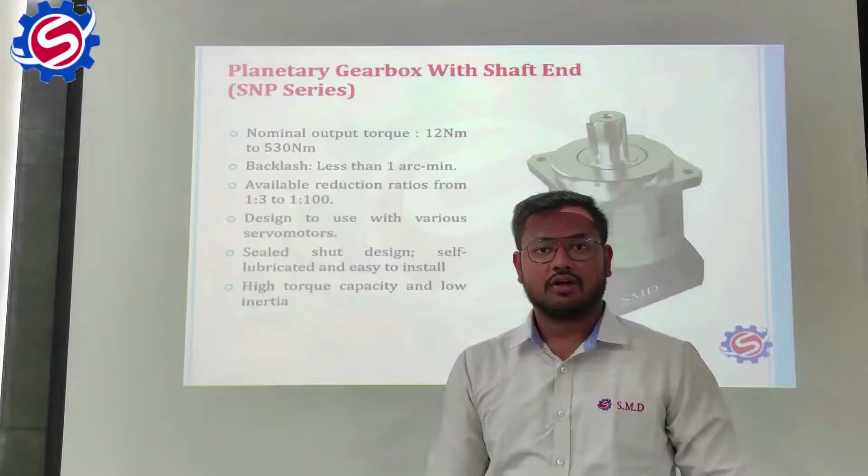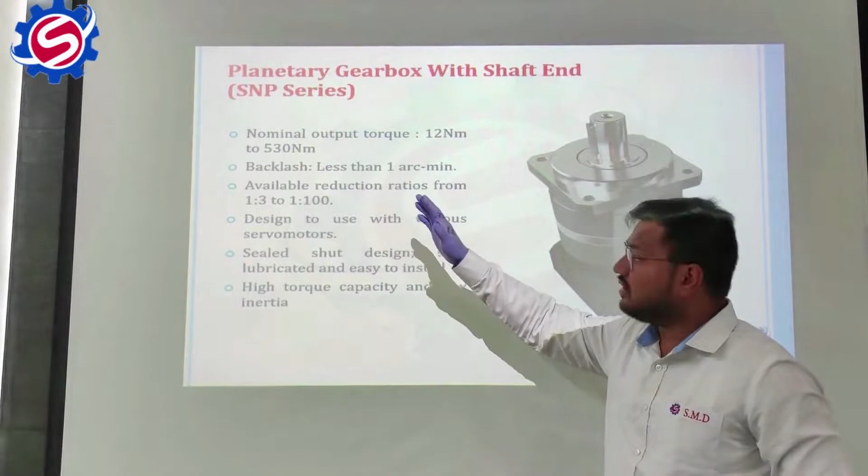Gearbox with shaft end, which is also known as SNP series. Our planetary gearbox nominal output torque range starts from 12 Newton meter to 530 Newton meter, which has backlash less than 1 arc minute. Available reduction ratio from 1:3 to 1:100.

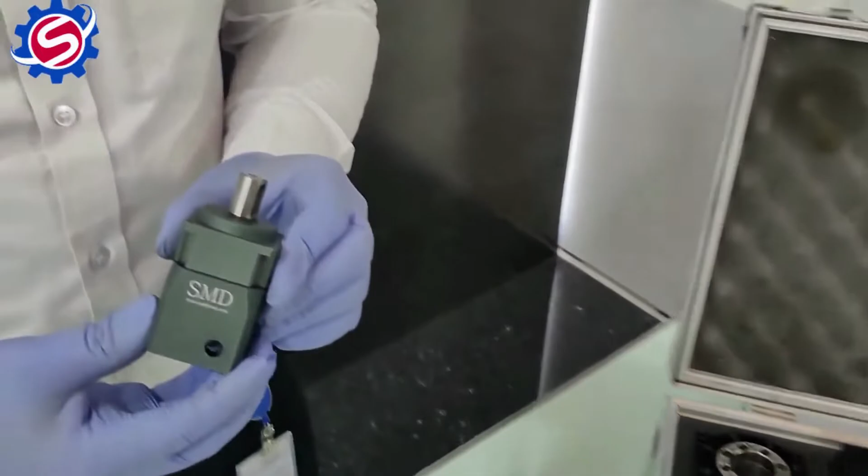So this is our SNP gearbox, which has shaft output. It is designed in such a way that it can be coupled with various servo motors, is self-lubricating and easy to install. The features of these gearboxes are high torque capacity, various types of reduction ratios available.

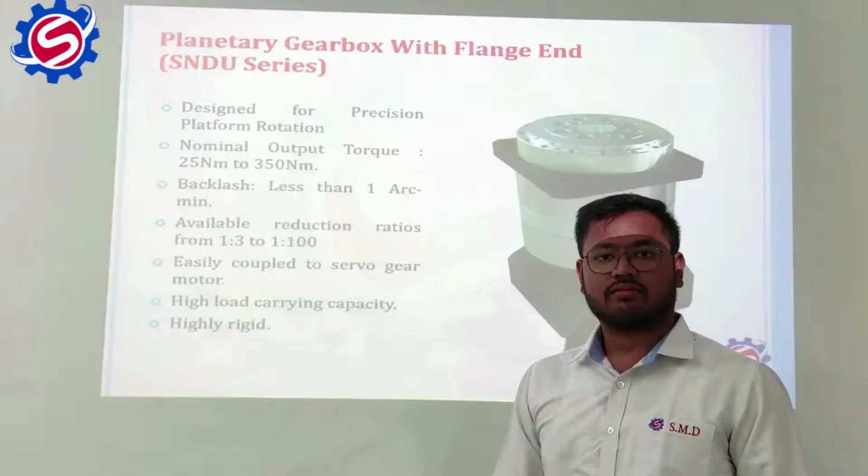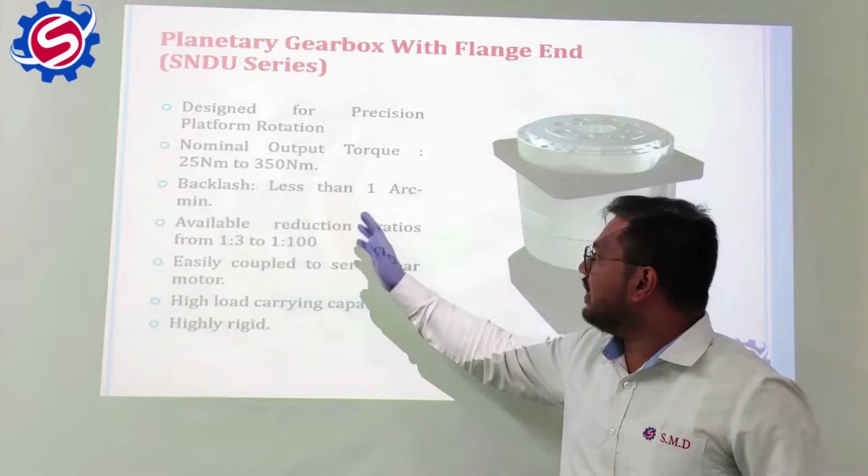Planetary gearbox with flange end, which is also known as SNDU series. This type of series is designed for precision platform rotation, which has nominal output torque ranging from 25 Newton meter to 350 Newton meter, backlash less than 1 arc minute, and the available reduction ratios are 1:3 to 1:100.

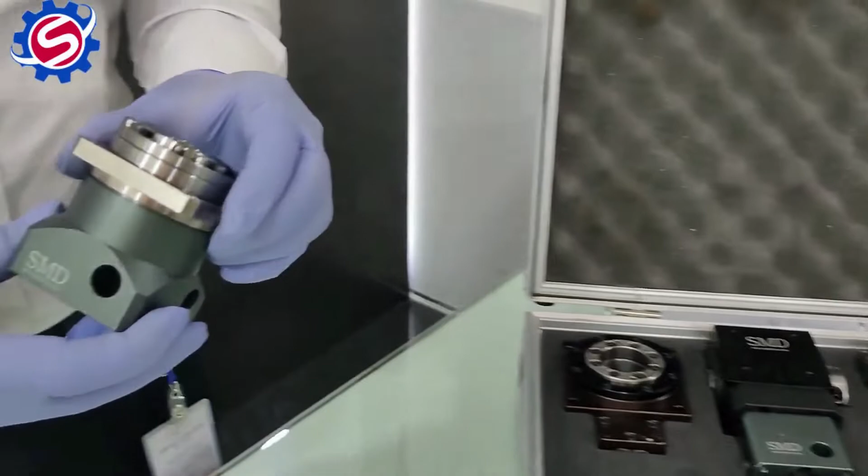So this is our SNDU series, which has flange as an output. The features of these gearboxes are high rigidity and high load carrying capacity. The frame sizes available in both the series are 40, 60, 90, 120, 150 and 180.

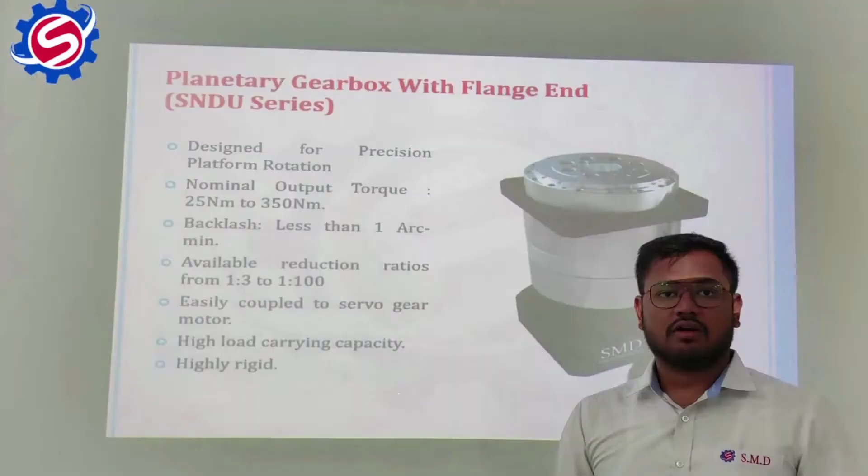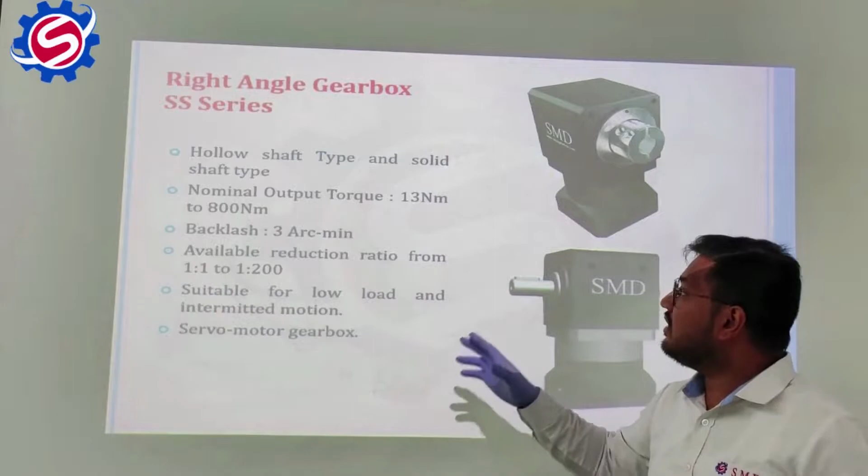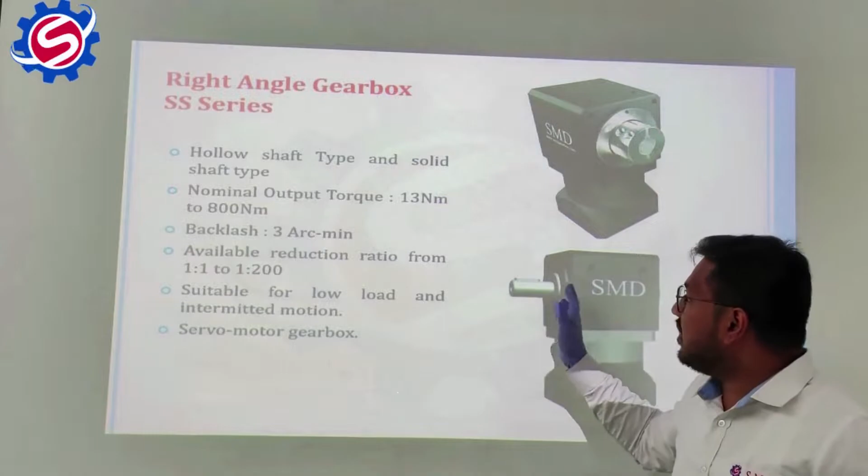Now moving on to our next series of gearbox, that is right angle gearbox, which is also known as SS series. So there are two types of right angle gearboxes available. The first one is hollow shaft and the second one is solid shaft. The nominal output torque for both kind is ranging from 13 Newton meter to 800 Newton meter. The backlash available is 3 arc minute and the ratio available for this type of gearbox is 1:1 to 1:200.

So these are our right angle SS series. This gearbox has solid shaft output and this gearbox has hollow shaft output. Both the gearbox are coupled with SNP series to get high reduction ratio, and there are various types of customizations available for both the gearbox.

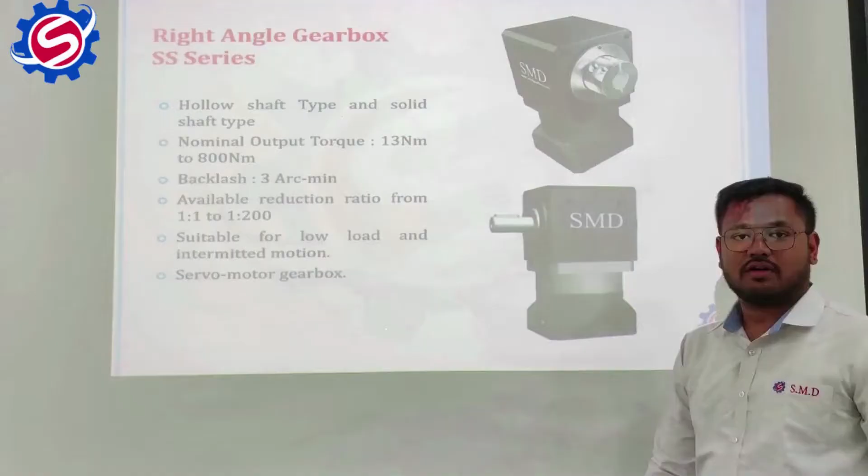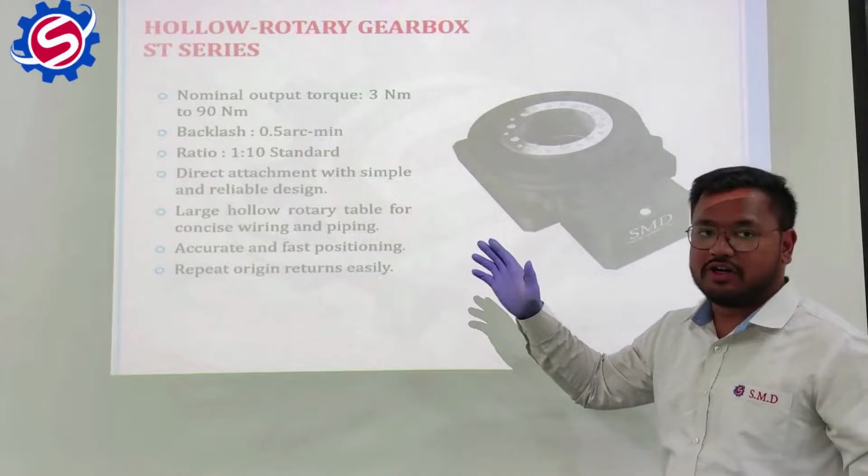Moving on to our next product, hollow rotary gearbox, which is also known as ST series. This type of gearbox is the most precise in hollow rotary segment. The nominal output torque for this type of gearbox is 3 Newton meter to 90 Newton meter. The backlash available is 0.5 arc minute and the reduction ratio is standard, that is 1:10.

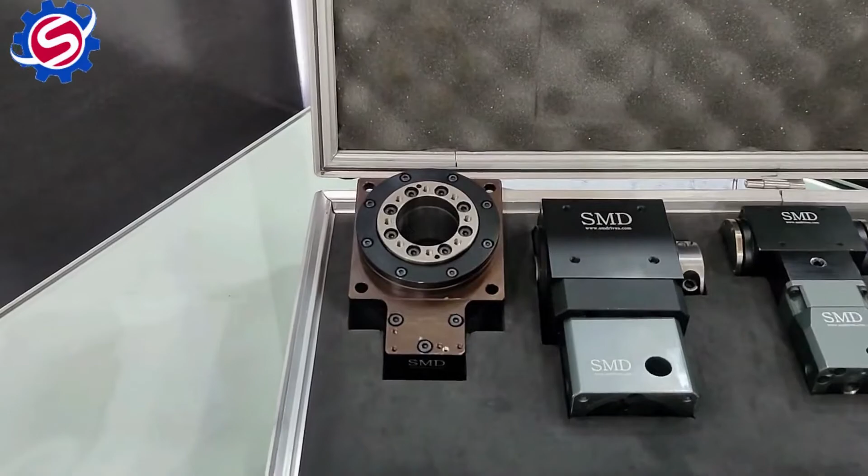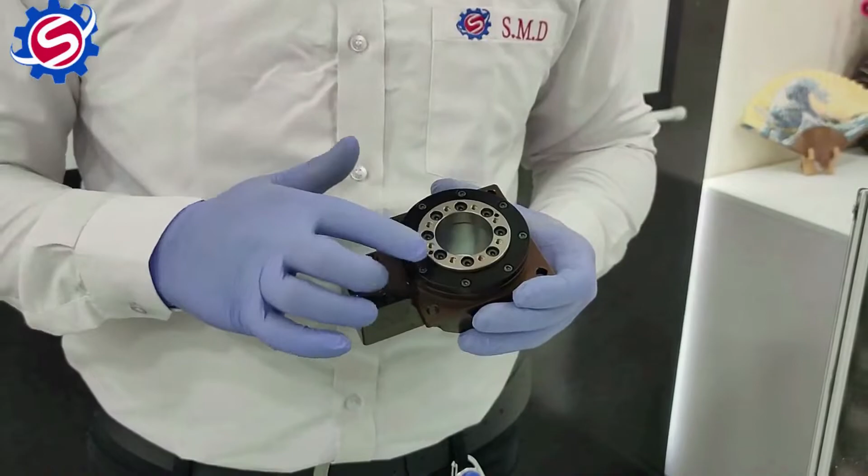So this is our hollow rotary gearbox, which is the most precise gearbox available in the hollow rotary segment. The rotational output is achieved on this flange and the hollow portion is provided to pass the wirings and the pipings. A cross roller bearing is attached inside on which the flange is mounted to withstand an axial load of 1 ton. This gearbox can be coupled with SNP and right angle series to achieve more reduction ratio.

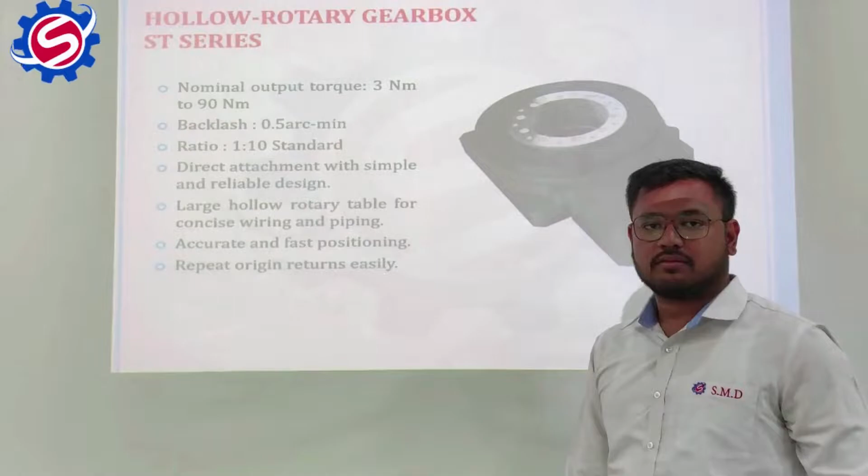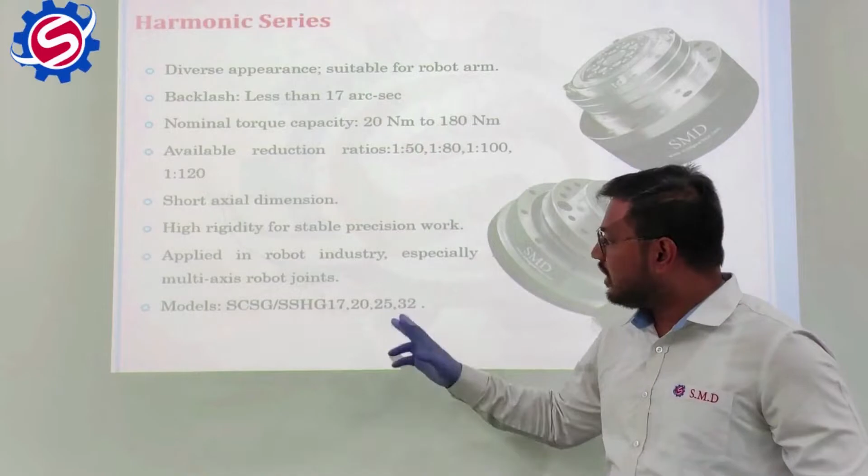Now moving towards the most precise segment available in SMD gearbox, that is harmonic series. Basically there are two types of gearboxes available. The first one is SCSG and the second one is SSHG.

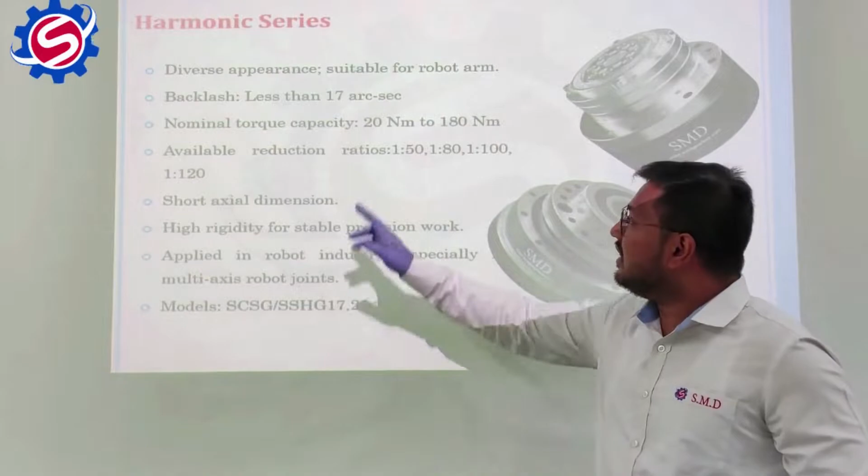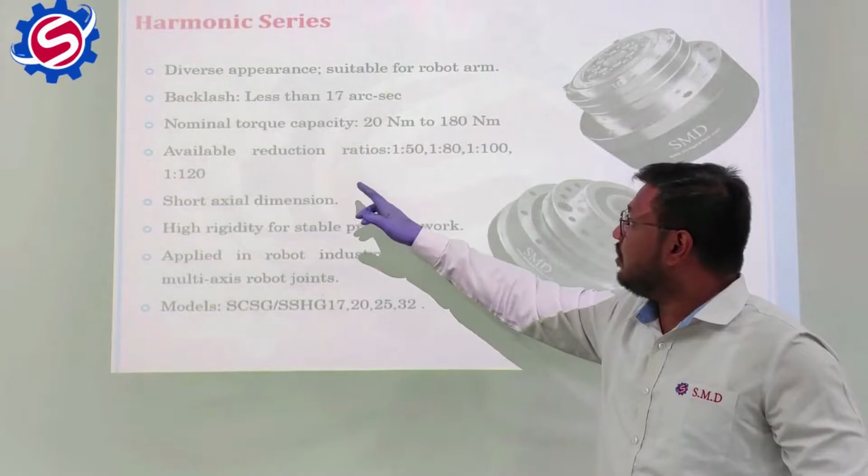The backlash available for these gearboxes is less than 17 arc second. The nominal torque capacity is 20 Newton meter to 180 Newton meter, and the reduction available for this type of gearbox is 1:50, 1:80, 1:100 and 1:120.

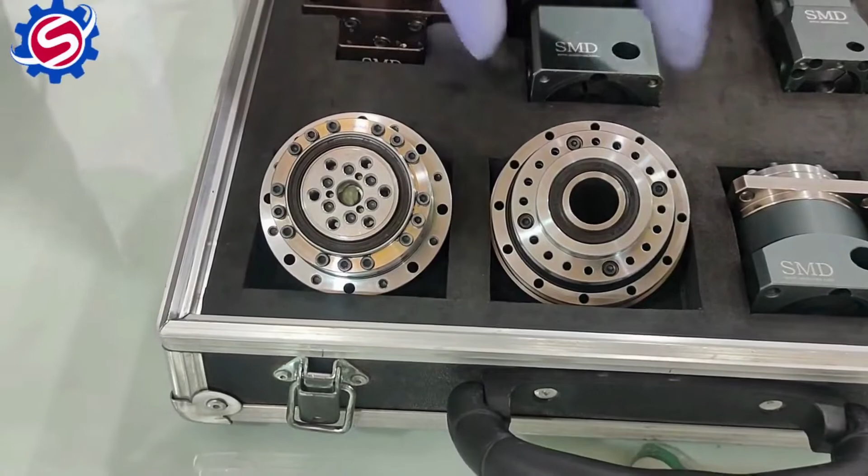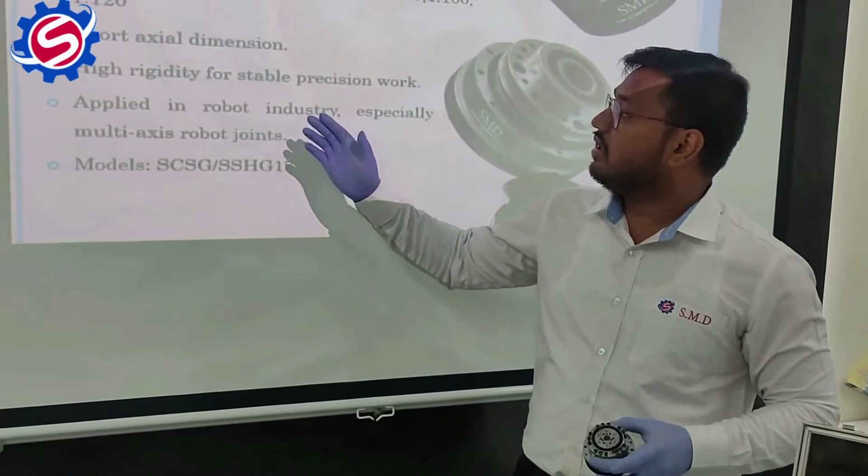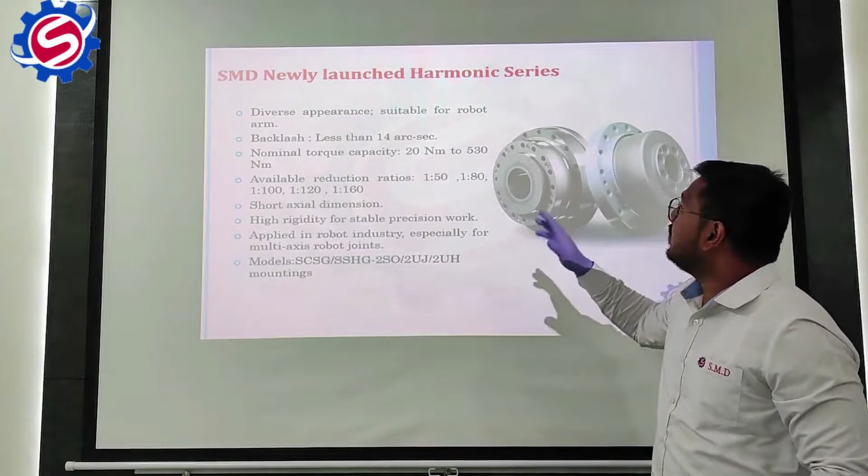So these are our two types of harmonic gearboxes available, SSHG and SCSG. This type of gearbox has a hollow shaft output and this type of gearbox has a flange output. The features of these gearboxes are short axial dimension, high rigidity for stable precision, and is usually used in robotic industries. SMD is launching new gearboxes in harmonic series, which are modeled in SCSG and SSHG.

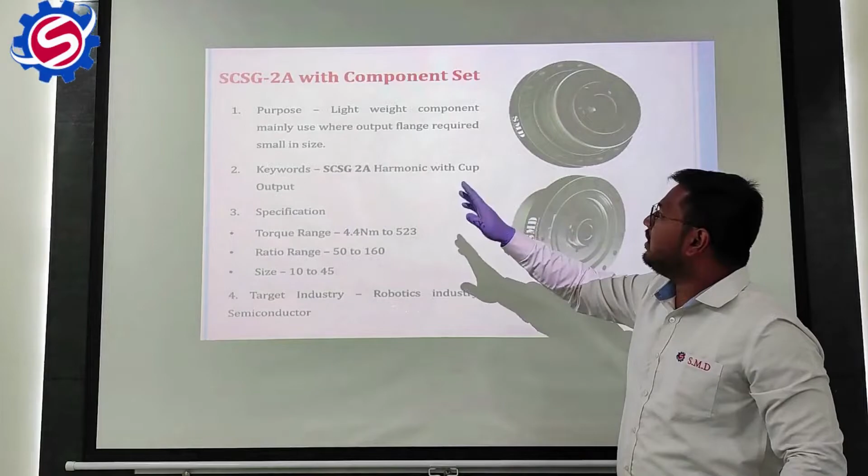This is the SCSG 2A with component set. The purpose of this gearbox is lightweight component mainly used where output flange requirement small in size. The keyword for this gearbox is SCSG 2A harmonic with cup output.

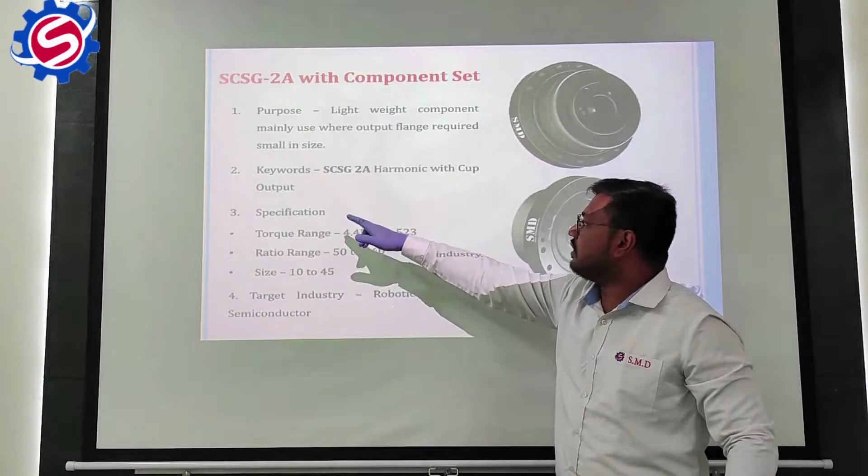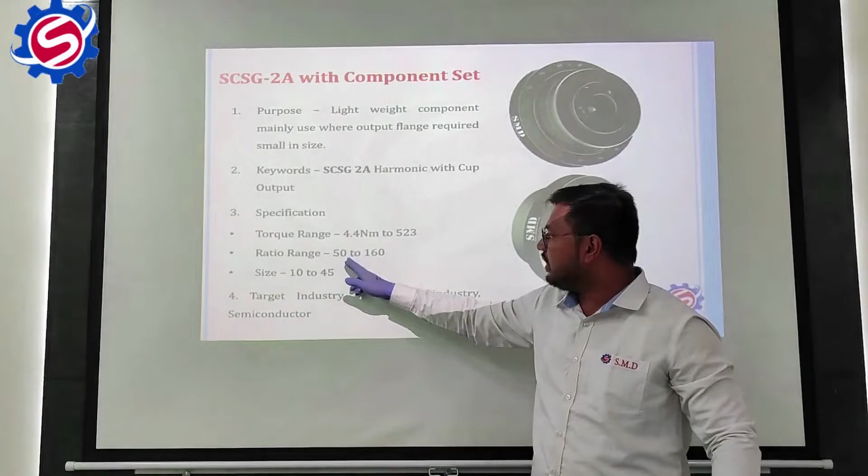The specifications of these gearboxes are: torque range 4.4 Newton meter to 523 Newton meter, reduction ratio available is 50 to 160, size available is 10 to 45. The targeted industries for this type of gearbox is robotic industry and semiconductors.

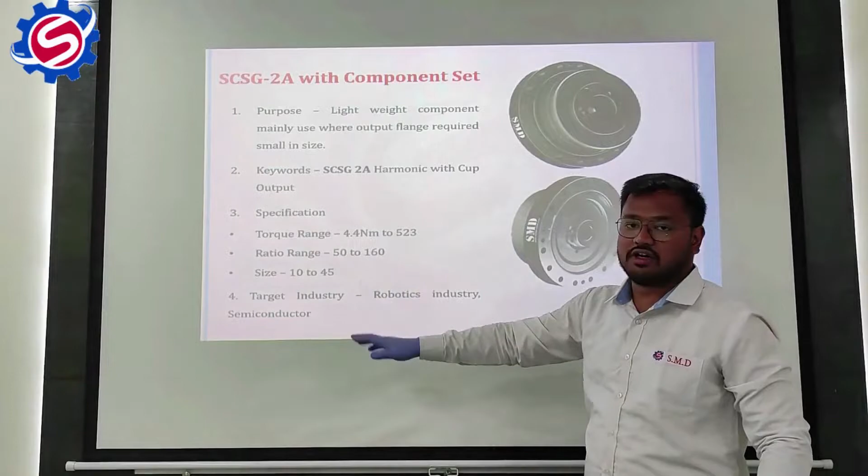Moving on to the next product, SSHG 2A with component sets. The purpose of this gearbox is used when large flange required than standard to distribute the load. Keyword SSHG 2A harmonic with large flange.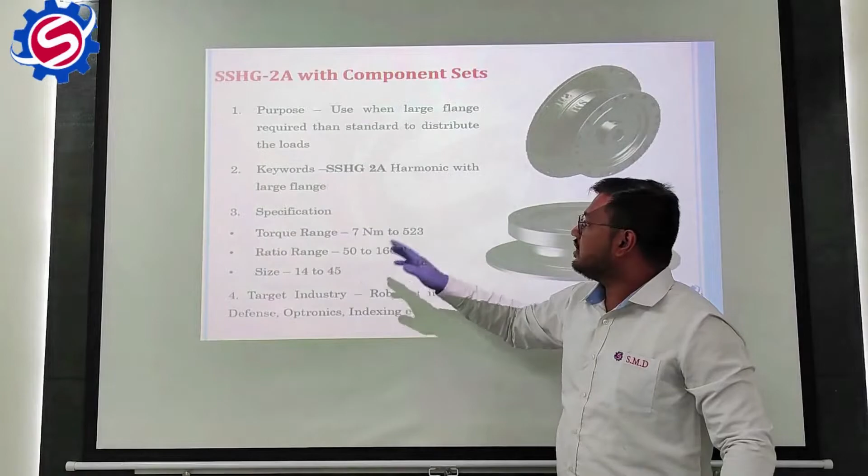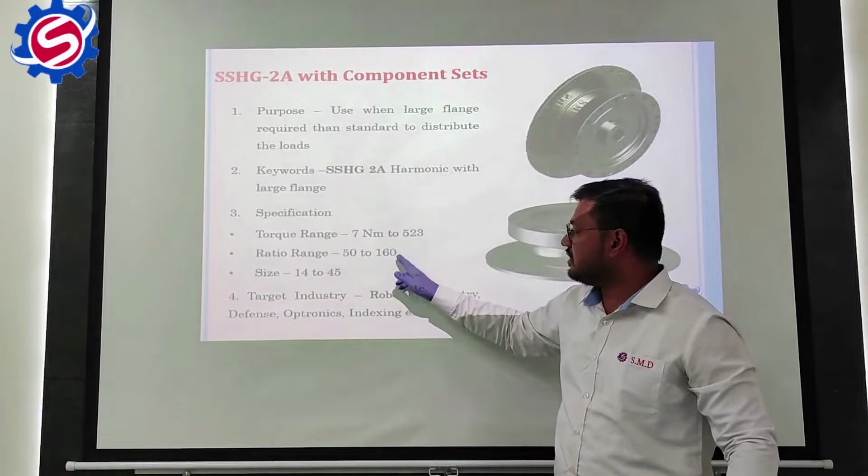The specification of this gearbox is the torque range from 7 Newton meter to 523, reduction ratio from 50 to 160, sizes available are 14 to 45. The targeted industry for this gearbox are robotic industry, defense, optronics, indexing and etc.

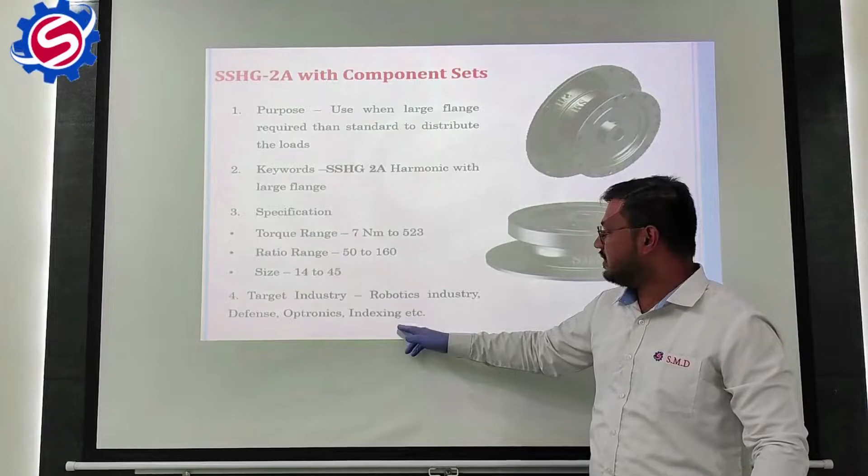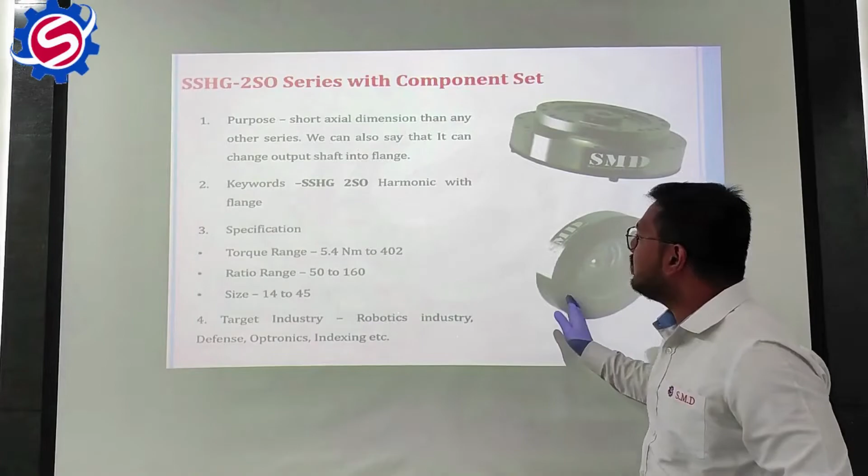Now moving on to our next product, that is SSHG 2SO series with component sets. Purpose of this type of gearbox is short axial dimension than other series. We can also say that it can change output shaft into flange. The keyword for this type of gearbox is SSHG 2SO harmonic with flange.

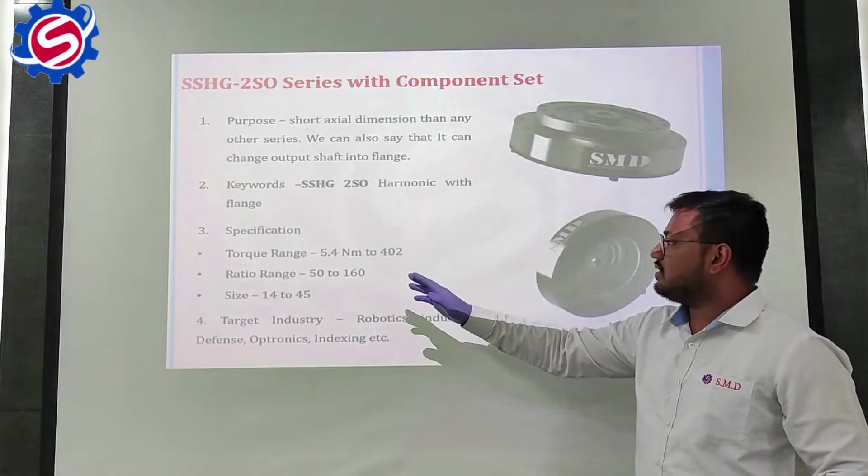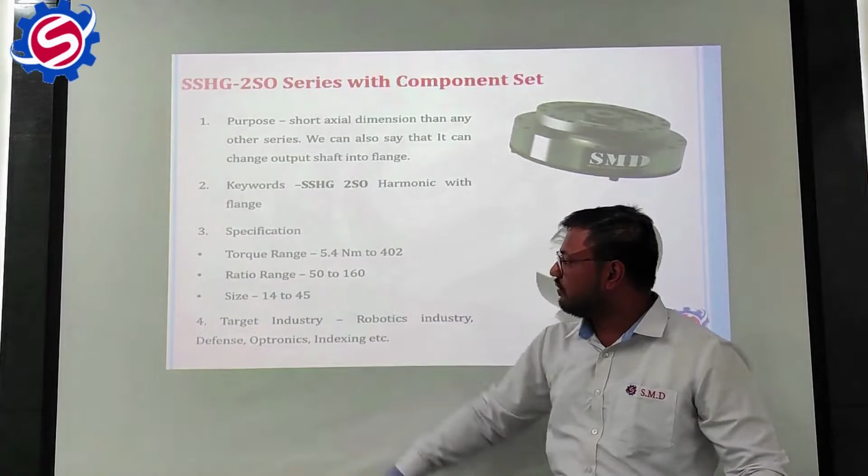The specifications of these gearboxes are torque range 5.4 Newton meter to 402. The reduction ratio available is 50 to 160 and the sizes available are 14 to 45. The targeted industries for this gearbox is robotic industry, defense, optronics and indexing.

The next gearbox is SSHG 2UJ with input shaft. The purpose of this gearbox is input has shaft end mounting, output is same as our SSHG series. Keywords SSHG 2UJ harmonic with input shaft.

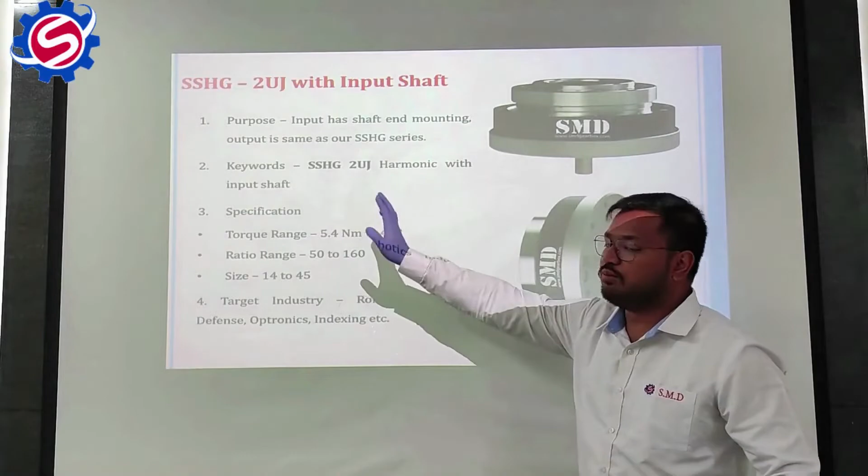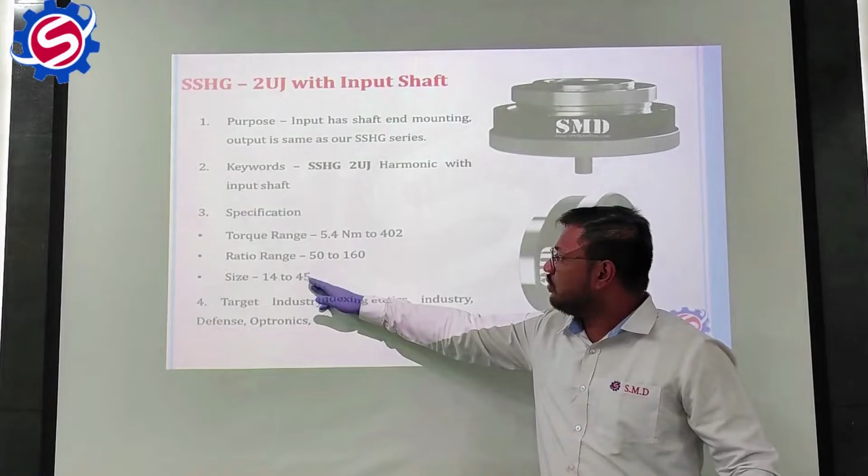The specifications of these gearboxes are torque range 5.4 Newton meter to 402, reduction ratio from 50 to 160 and the size available is 14 to 45. The targeted industries are the same: robotic industry, defense, optronics and indexing.

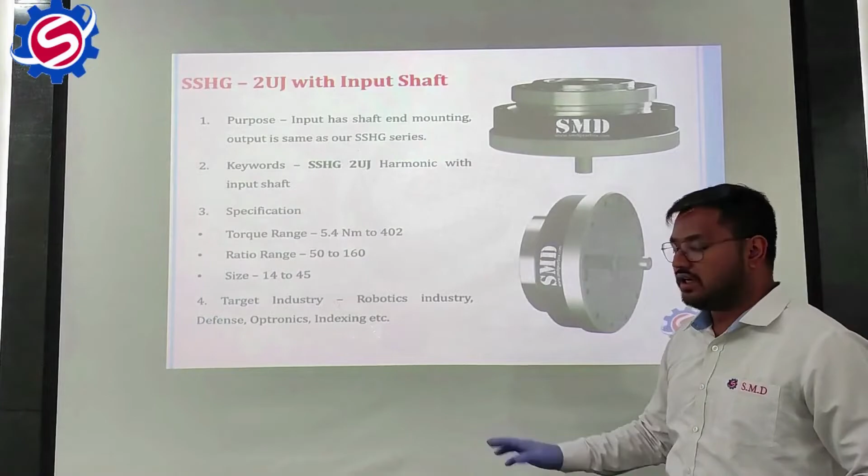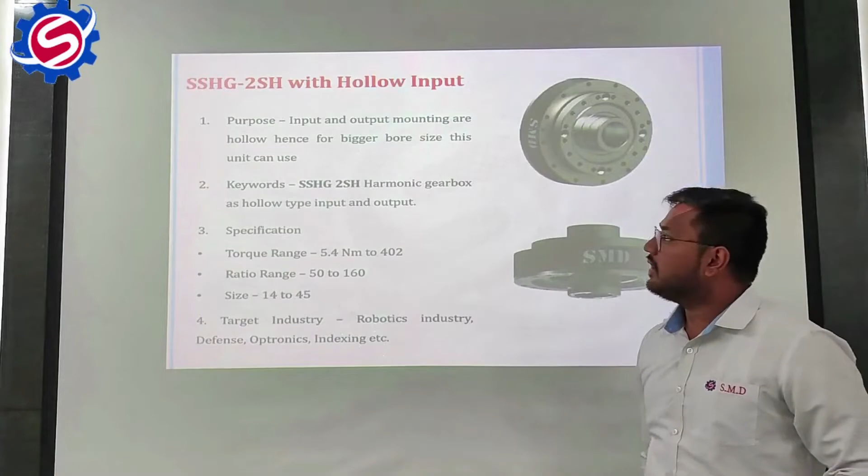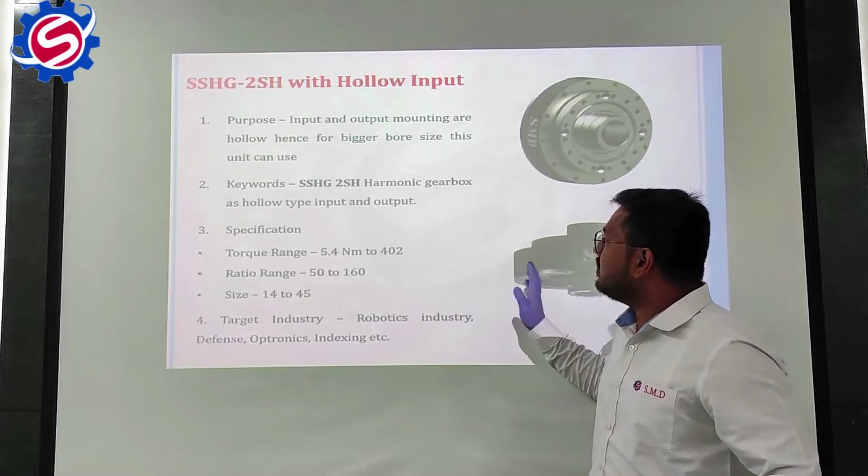The last series in our harmonic gearbox is SSHG 2SH with a hollow input. The purpose of these gearboxes is input and output mountings are hollow, hence for bigger bore size this unit can be used. The keyword for this gearbox is SSHG 2SH harmonic gearbox has hollow type input and output.

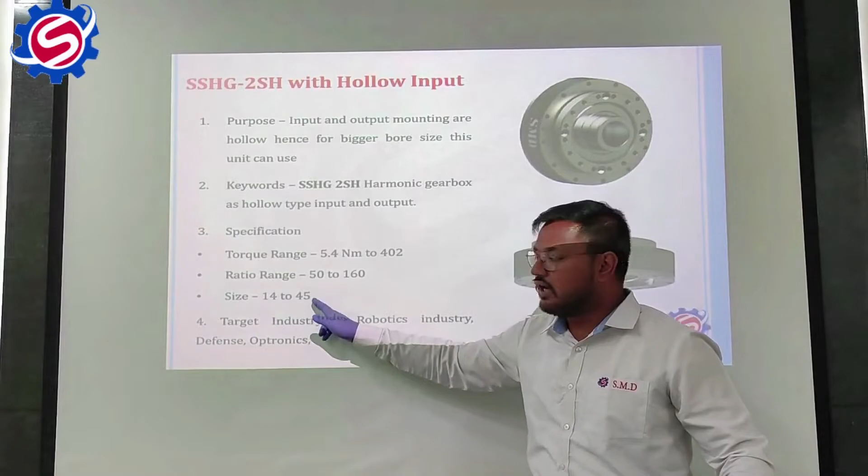The specification for these gearboxes are torque range 5.4 Newton meter to 402 Newton meter, reduction ratio 50 to 160, size 14 to 45. The targeted industries are the same: robotic industry, defense, optronics and indexing.

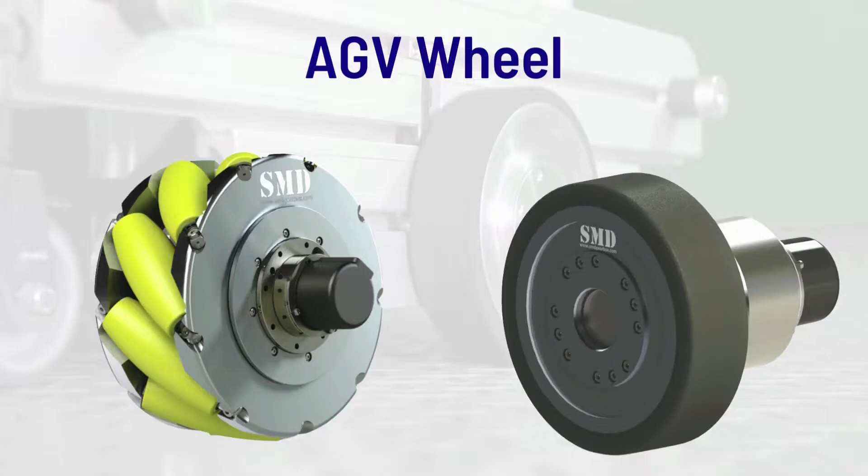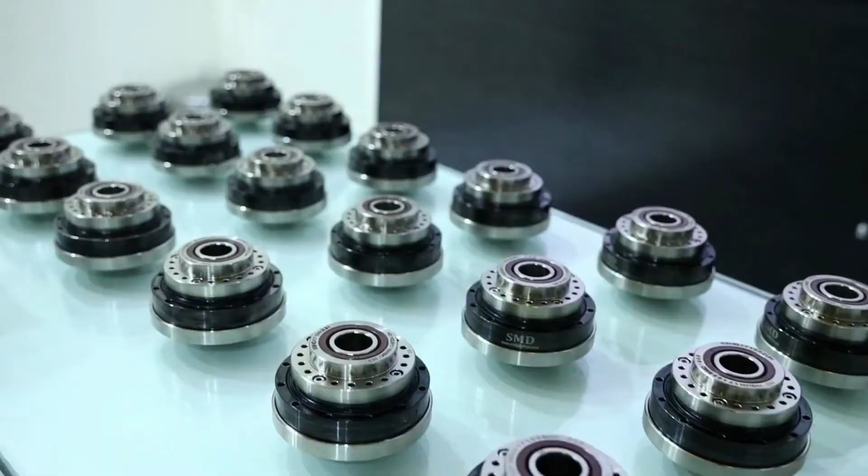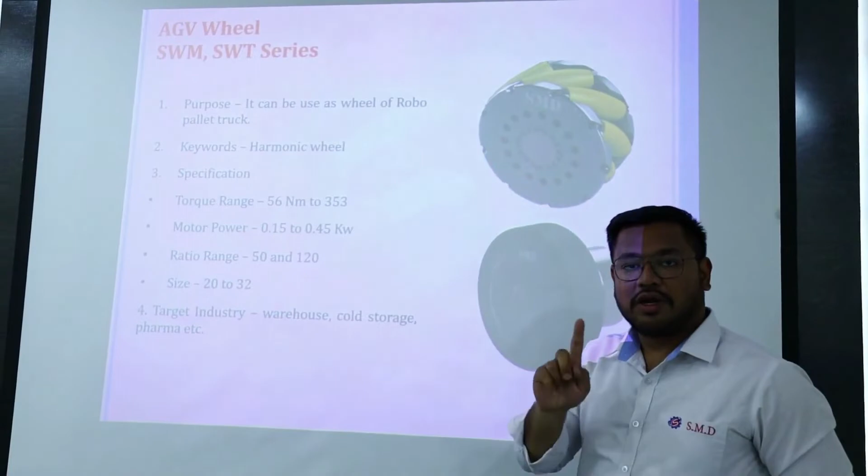Now, moving to our next product, which is AGV wheel, which has nomenclature SWM and SWT. There are two types of AGV wheel: mecanum wheel and traction wheel. The purpose of AGV wheel is it can be used as a wheel for robo pallet trucks.

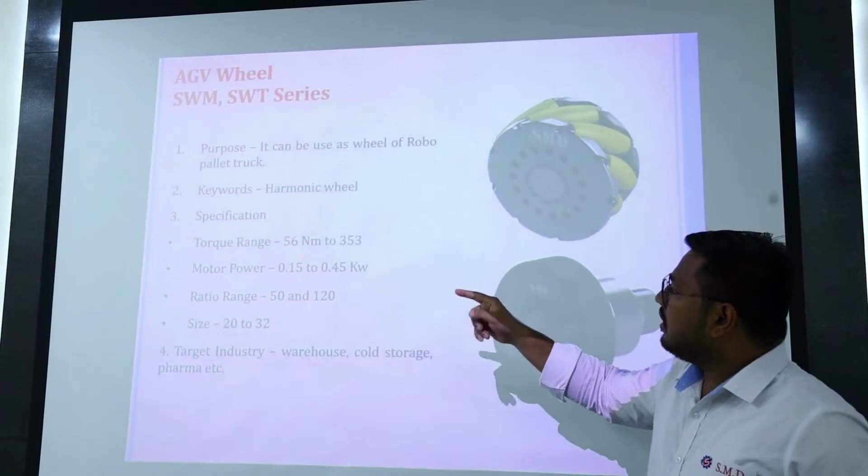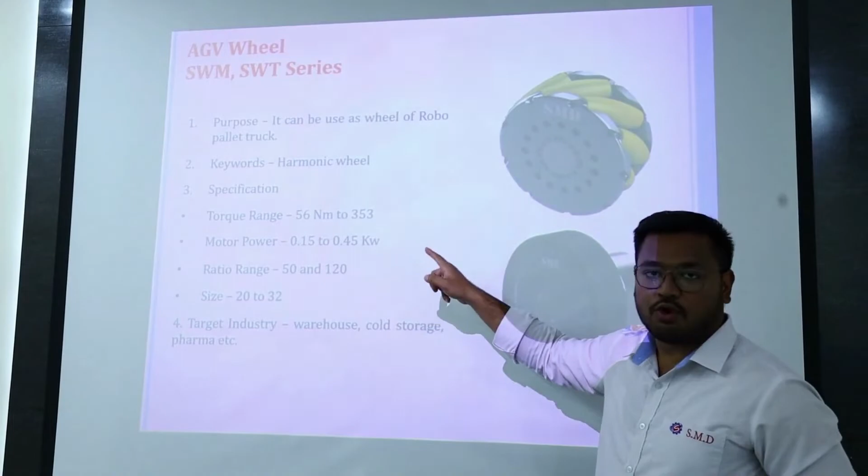Torque range 56 Newton meter to 353 Newton meter, motor power ranging from 0.15 kilowatt to 0.45 kilowatt. Reduction ratios are 50 and 120. The targeted industries are warehouse, cold storage and pharma.

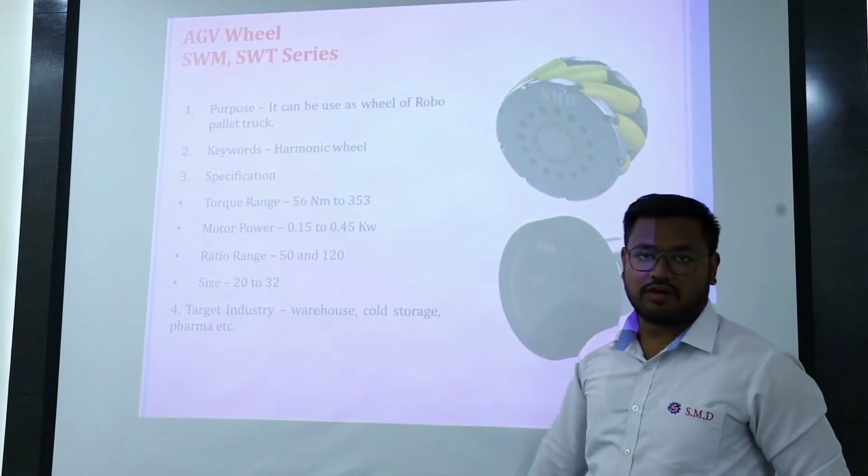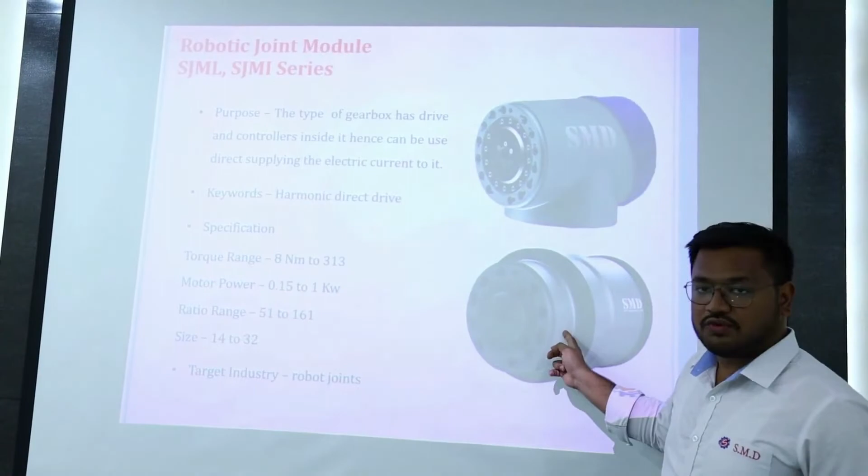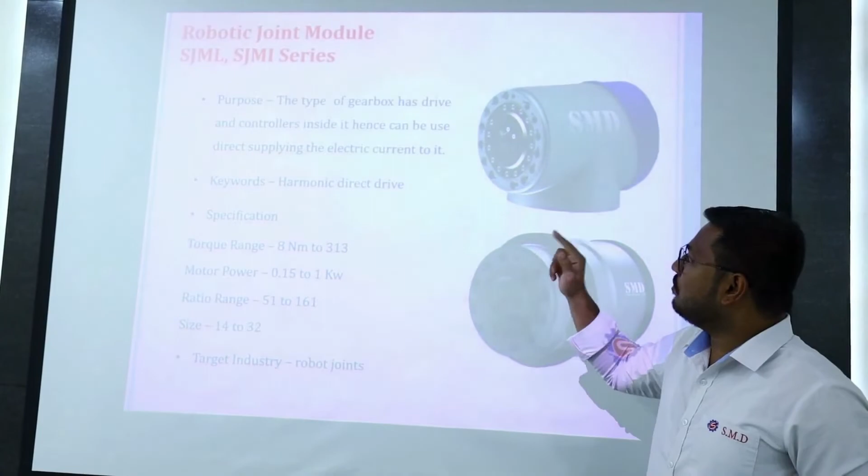Now next product, robotic joint module, which has its nomenclature as SJML and SJMI. There are two types of robotic joint module: I-type, which is this one, and L-type. The purpose of this particular product is the gearbox has drive and controllers inside it, hence can be used directly supplying electric current to it.

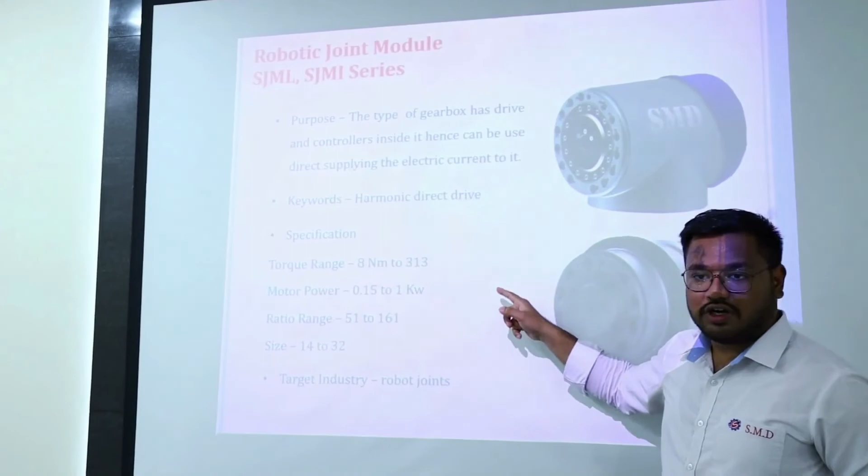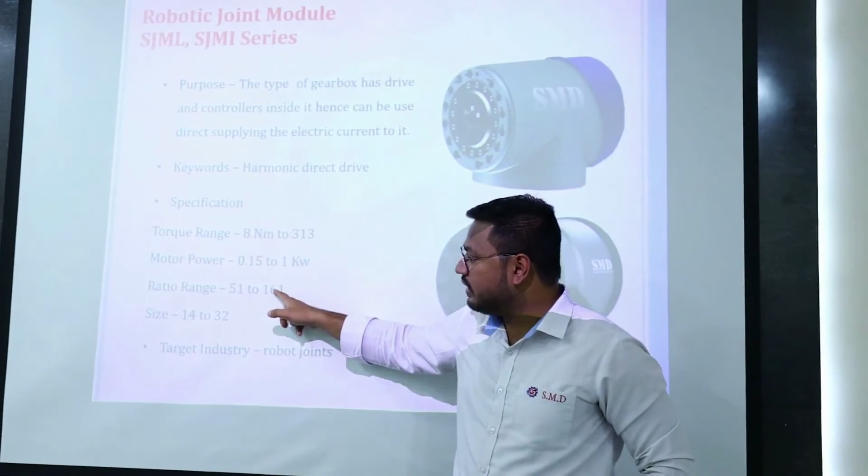Keywords: harmonic drive gearbox. The torque range is 8 Newton meter to 313 Newton meter. The motor power range is 0.15 to 1 kilowatt. Reduction ratios available are 51 to 161 and sizes available are 14 to 32.